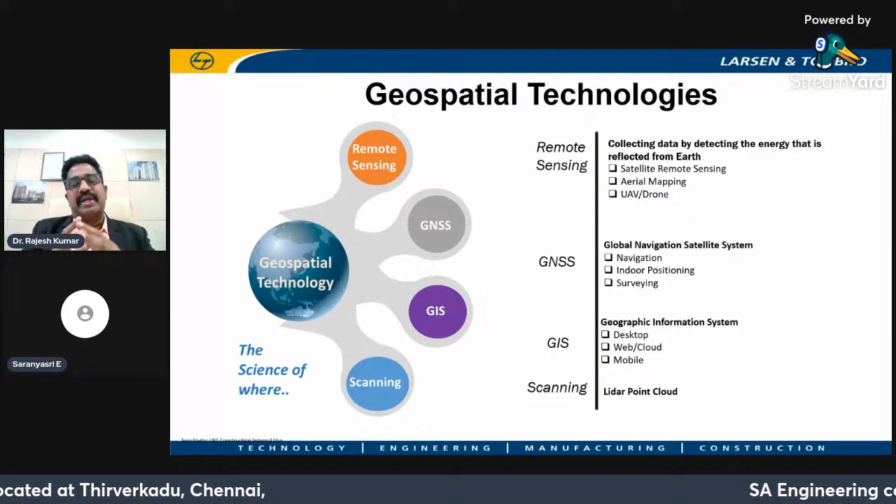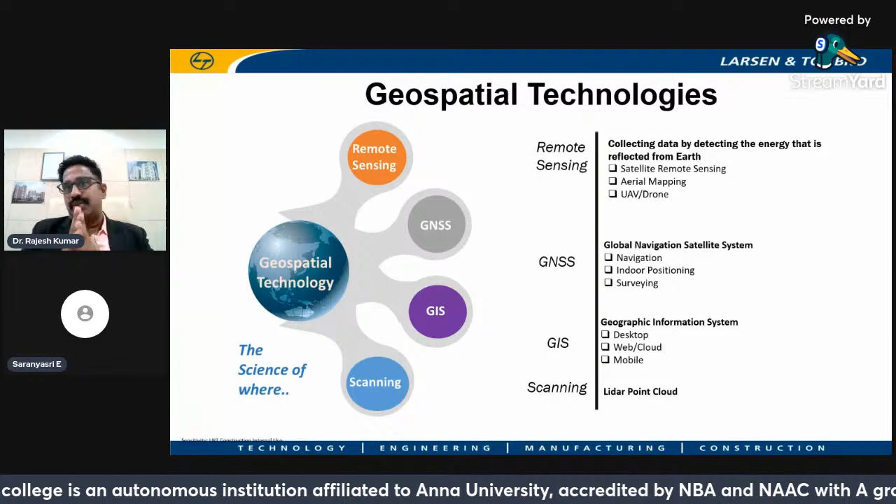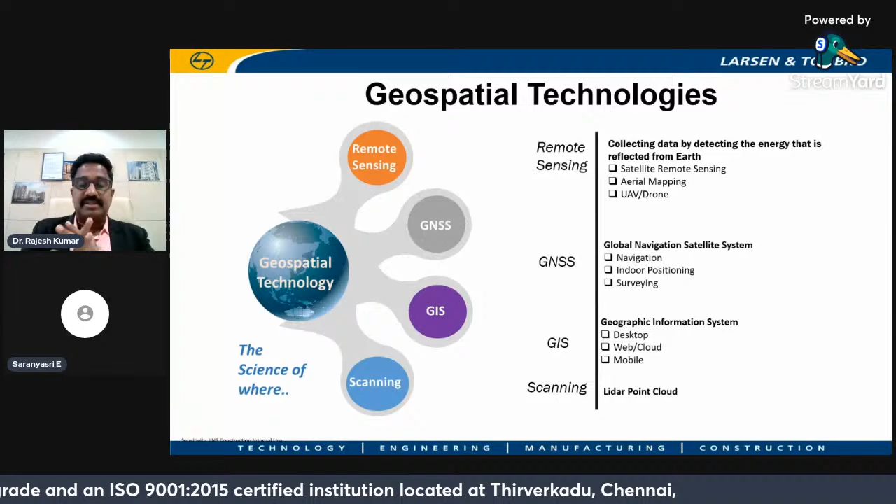Third one is GIS, Geographic Information System. It is a software. You may have knowledge of AutoCAD, where you'll be drawing and vectorizing lines, but you will not be showcasing the spatial data on it - latitude and longitude. You may be having coordinates, but not the latitude and longitude. That spatial data, the so-called spatial data, will be linked with the non-spatial data through GIS. GIS was earlier used just as an information system, but now it is not only for that - it is used for many things, which we'll see in subsequent slides.

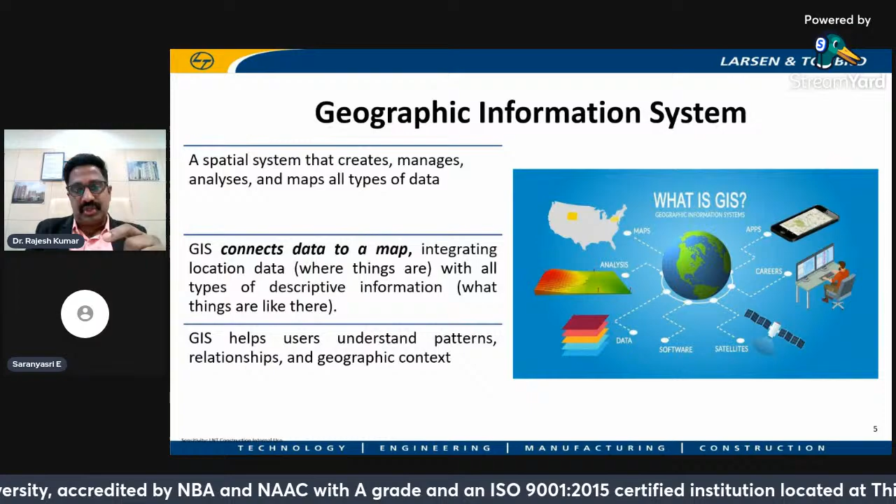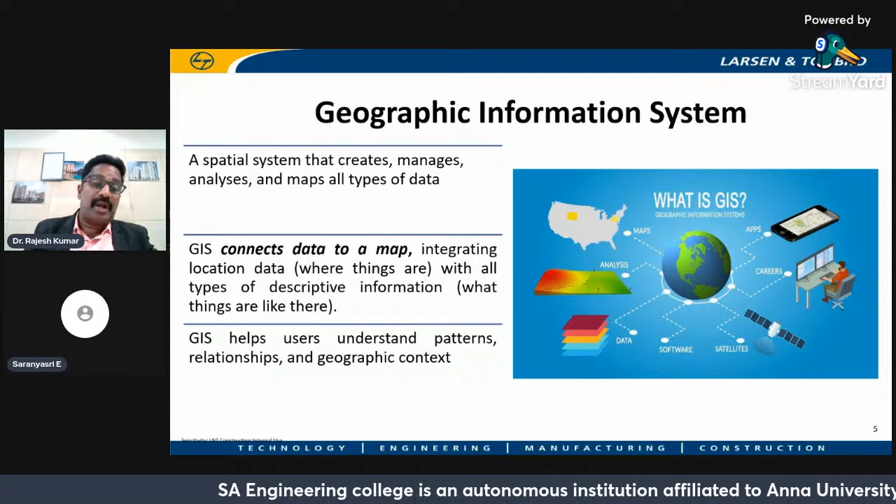As I told, this is just a view of remote sensing, where we'll be getting the energy source, and from the energy source it will reach the target, till it goes to the product applications - with no need of touching that particular area, and no need to know the complexity of remote sensing. Remote sensing is a simple process. GPS is a simple process where we'll be getting latitude and longitude. GIS is a software. All these three - remote sensing, GPS, and geographic information system - put together is called geospatial technologies, which we are using. We mostly go with GIS software, but the data needed is created, captured, or acquired using GPS or remote sensing techniques.

The most important thing I want to mention is lidar mapping. We started with chain surveying, then compass, plane table, then theodolites, and so on. Then leveling - the digital level was there, electronic total station was there. After that we went to GPS survey, and now we are in aerial lidar. The accuracy of aerial lidar is very high.

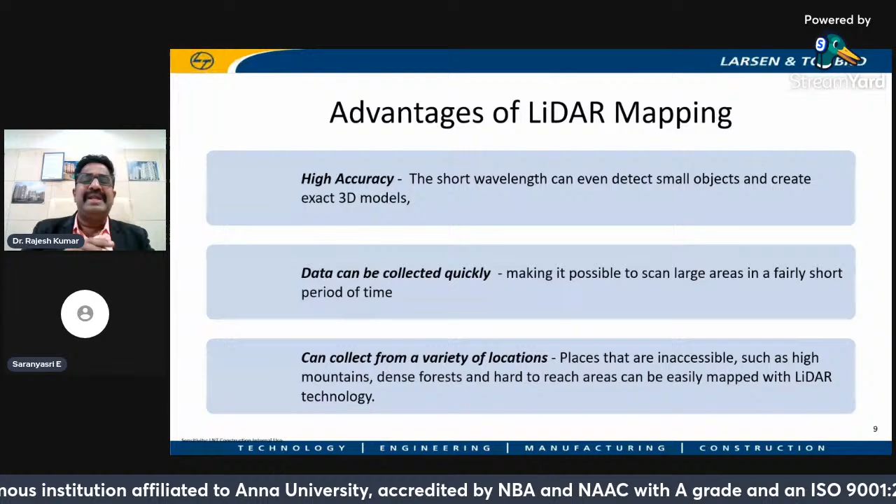Within 2 months, we can complete the total process of surveying if we are going for lidar mapping. The higher the possible area, we need to go for lidar mapping. The accuracy is in centimeters, so we easily get all the other derived details like contouring, DEM, or DTM, whatsoever it may be. Land use and land cover maps will also be derived from lidar. So anything is possible, and the accuracy leads to a lot of things in lidar. Nowadays, for any type of project, we are going for lidar. We are not just seeing the value of money, but the advantages and quality of the data we get using lidar.

These are some of the digital solutions which we have created in our team using geospatial technologies. The first one is called chak planning.

We divide the area into small parts when starting the irrigation system or any other bigger mega projects, where we are working with 1,000 or 2,000, even up to 5,000 crore projects. The area is very high, going up to lakh hectares, so the CCA will be more. When the CCA is more, it is not possible for us to go with AutoCAD, and the manpower we need will be more. We need 40 to 50 people in AutoCAD to do the chak planning, which is simply division of land into pieces of the required size, maybe a hectare, 0.5 hectare, 2 hectares, or 5 hectares, depending upon the client specifications.

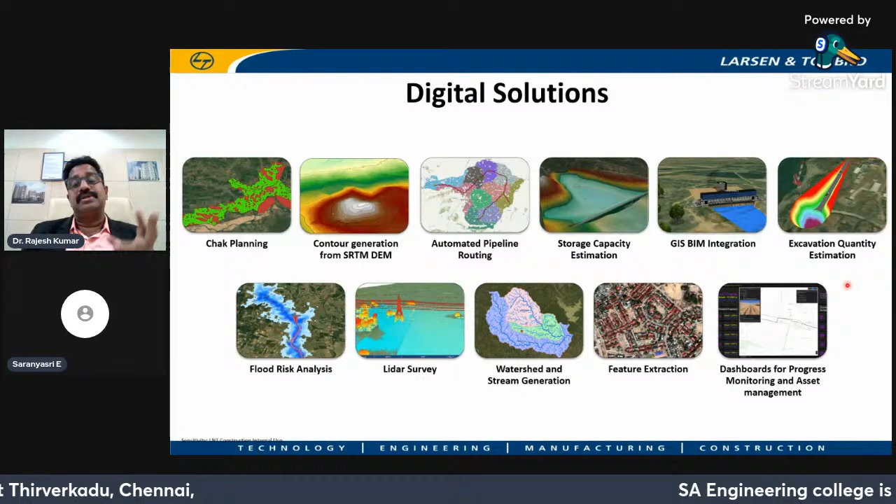Next is storage capacity estimation, which we have also done. Then GIS BIM integration, the details of which are in the forthcoming slides, which I'll showcase. And excavation quantity estimation, I don't know whether the slide is available or not, but I'll give a gist.

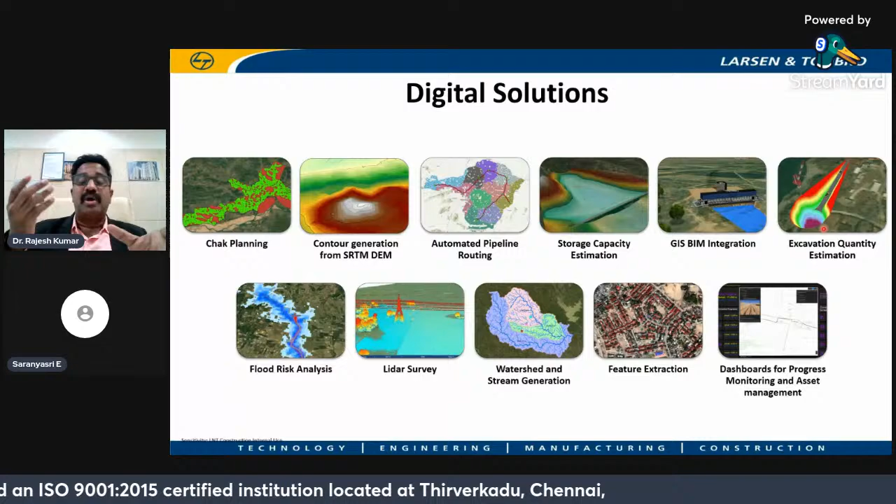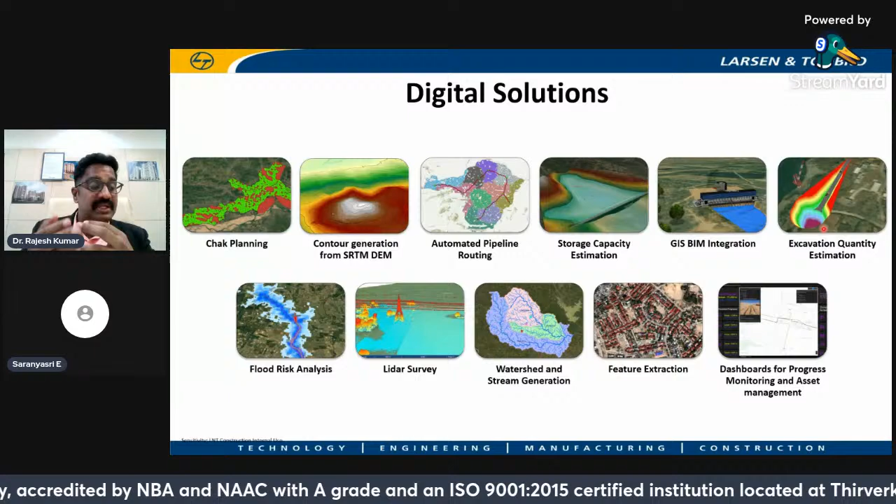After GIS-BIM integration, we had excavation quantity estimation. When using manual processes like the trapezoidal rule or Simpson's rule for excavation quantity estimation, the boundary will be intact with a defined shape. But in practical excavation quantity estimation, we will not have any intact boundary - instead it will be very irregular. So for that irregular boundary, we have used GIS processes to estimate the quantity.

Next, the most important thing we are doing is flood risk analysis. A lot of the areas where we do projects are prone to flash floods, so anytime it may come. We are doing flood risk analysis using GIS and HEC-RAS.

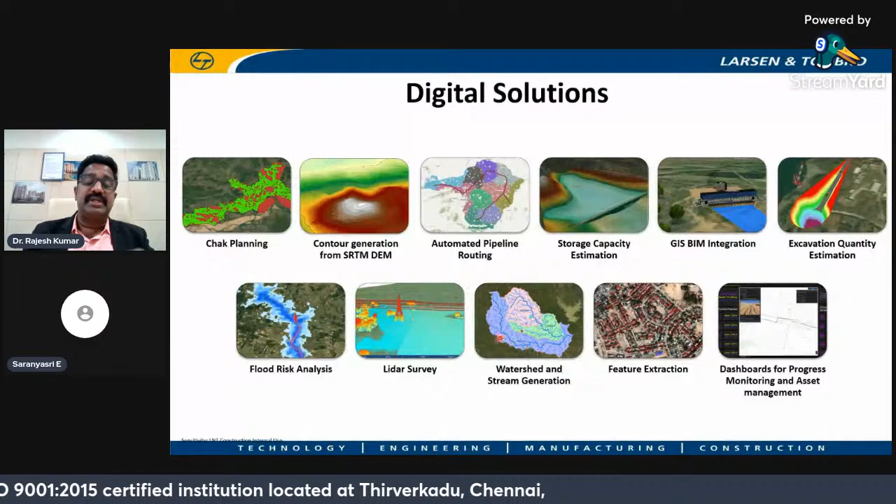Then lidar survey, as I already told. Then watershed and stream generation - the shape of the watershed and the streams flowing inside it. All of this we have done digitally.

The most important thing is feature extraction. Earlier we would go for visual interpretation of satellite imagery, but now we do it automatically. The feature classes will be extracted automatically - we train the system with training sets, and then we get the results.

Then the most important thing we have started here is progress monitoring. When we wanted to showcase our digital solution, the first application we showcased was progress monitoring. After designing, the project goes to the execution stage, and when it goes there, we need to know whether execution is happening or not.

Just like in a college, there will be top management down to lower management. Likewise here, we have the CEO, then directors, then VPs, then GMs, then other project managers. So if project managers want to showcase anything to the CEO or higher management, they would normally need to go to the particular place to see the progress.

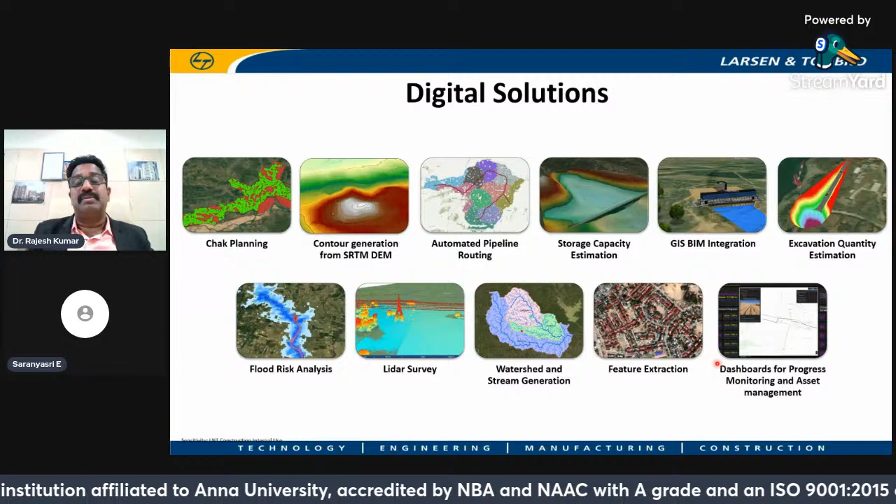Instead, what we have done is put everything into a GIS environment, so from their own place, they can see the progress. At the end of every day, they can see the progress. So at the site, there will be updates on how many kilometers have been completed, and we can immediately see it here itself. We have created dashboards which have had a great impact in our industry.

This is a process of lift irrigation, where I am working. We do a lot of irrigation projects where we have an intake from a river or any source of water. From there, the water is taken and eventually distributed to the farmer's land.

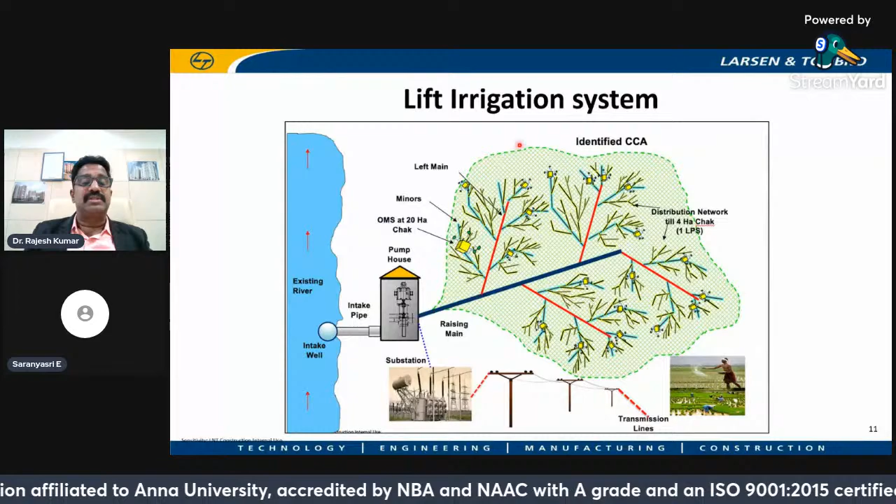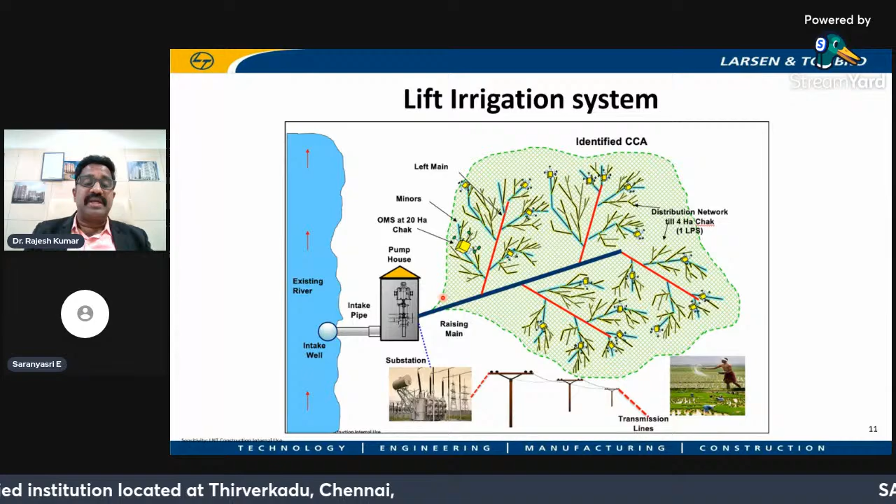So this is the main pipeline, and these are the distribution pipelines - all of these are distribution pipelines, and they are designed accordingly. Pump houses are designed by the civil team, and the pipeline design is done by the mechanical team. This pipeline design and mechanical design work, we have now automated using geospatial technologies.

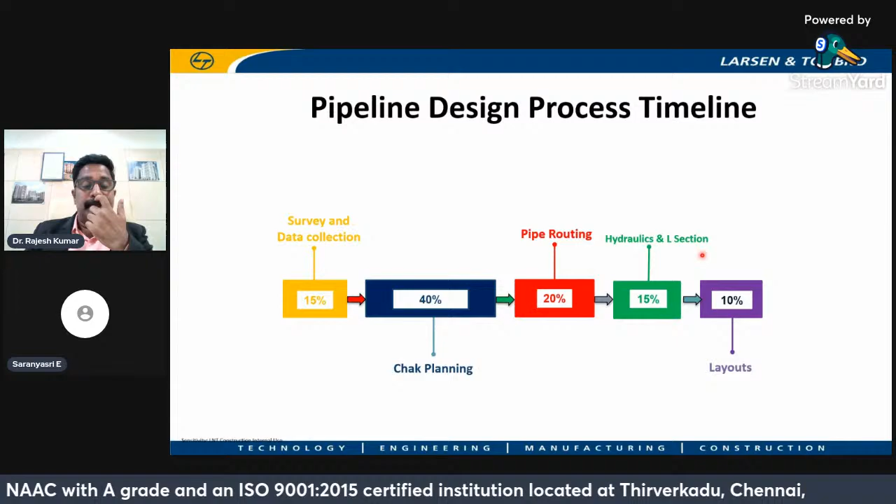This is the pipeline design process. It starts with survey and data collection, then we have the chak planning process, then pipeline routing, then hydraulics and L-section, and finally we prepare layouts which are submitted to the client.

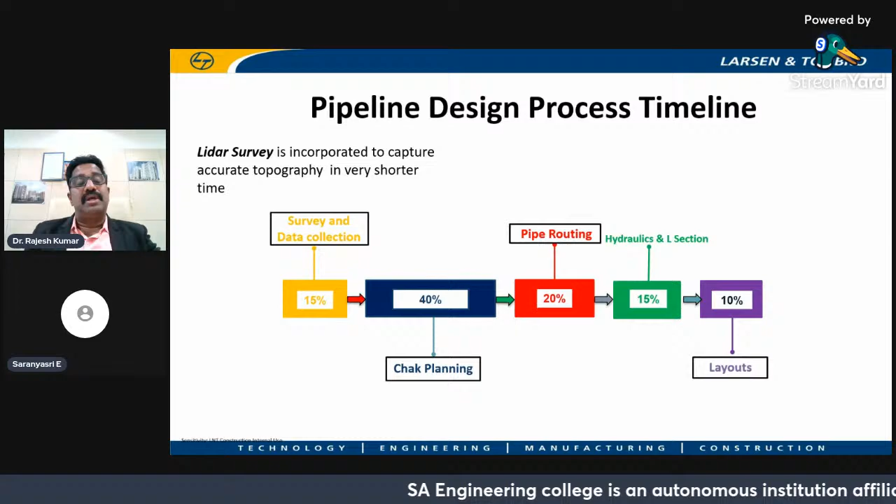That is the conventional way. What we have done instead of a normal total station survey is go for LiDAR survey, since we can capture a larger area in much shorter time, and more accurately too.

For planning and chak planning, we are using a GIS-based tool, which reduces more than 60% of the man hours and time. Next, automated pipeline routing has reduced nearly 90% of the man hours using geospatial technologies. Then for the layout, we have reduced almost 90 to 95% of the drafting time.

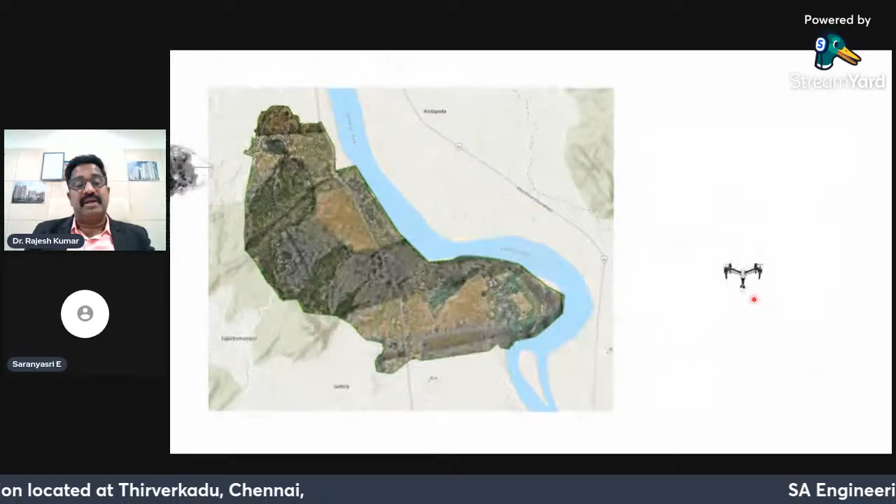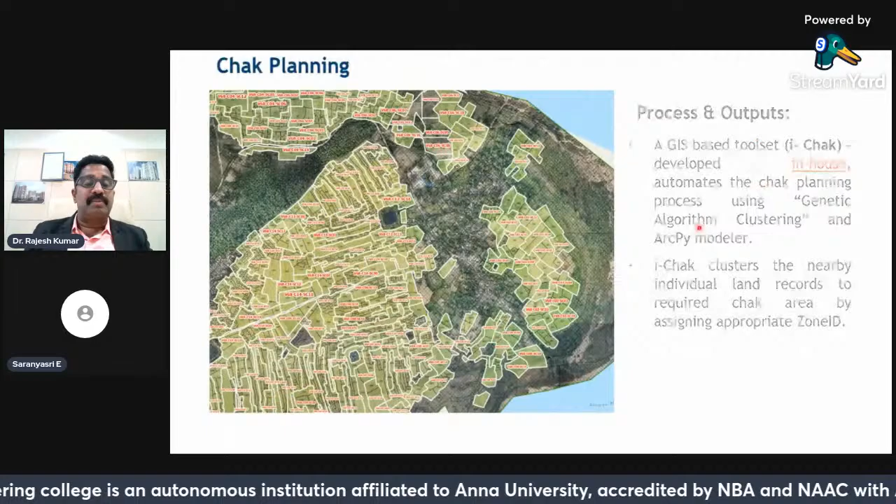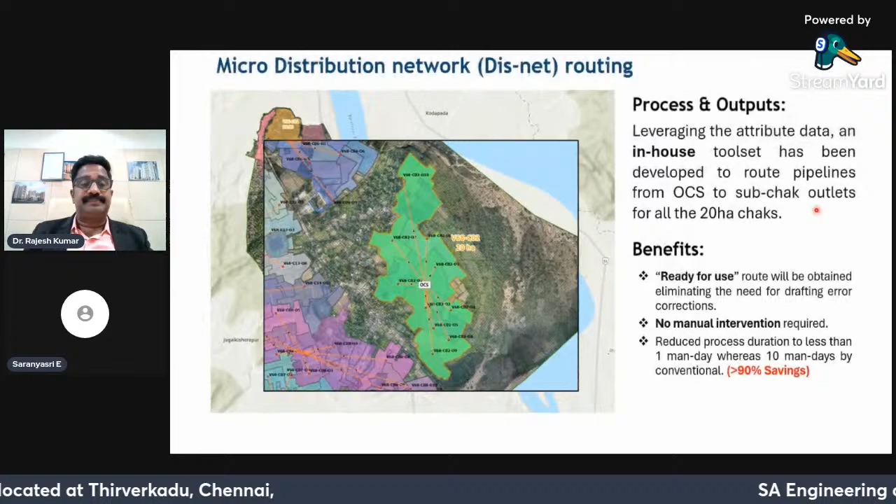And this is micro distribution network routing. These are all routing; we have used the least cost path method for the main pipelines. What we have done is take these main pipelines into the WaterGEMS software. These are the visually appealing outputs. As per the client requirement, we'll be making the outputs and submitting it.

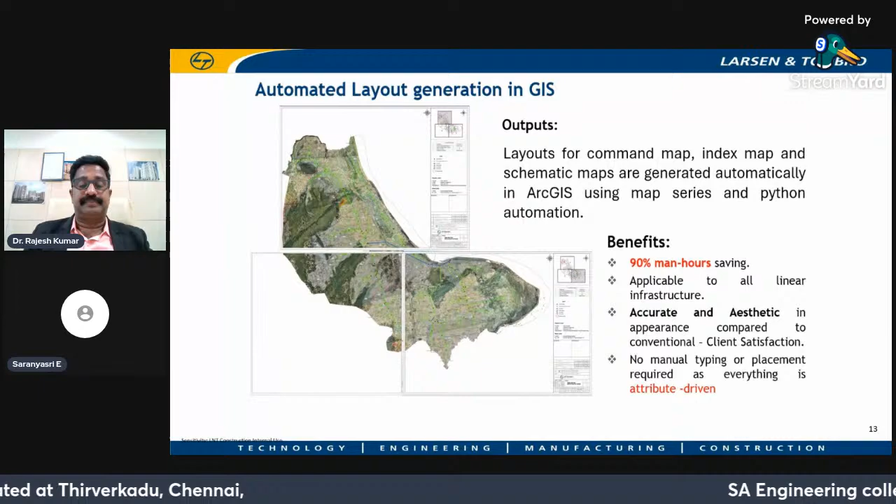Next comes GIS BIM integration. You may already know about BIM technology, building information modeling. It produces a three-dimensional model, and each and every model created with BIM is very heavy.

So what we'll be doing is bringing that BIM model into GIS. Maybe some 100 or 150 models will be there for each project, and all those 3D models will be brought into GIS, so we can see them very easily. Not only the models, but three-dimensional pipelines also will be brought here.

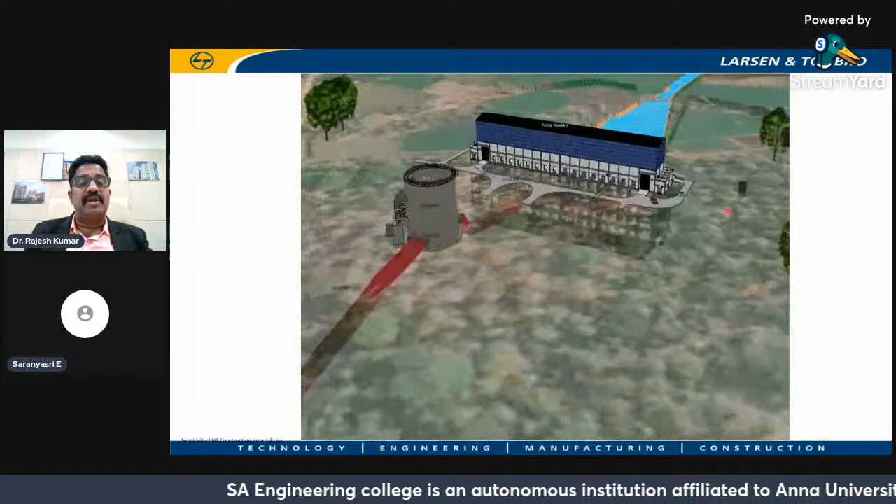You can see a video here. This is a pump house model that has been brought into the GIS environment. This is the booster pumping station, and these are the three-dimensional length pipes with chainages also. You may be aware of chainage - each and every chainage will be there, and you can see the land use. There is satellite imagery beneath this.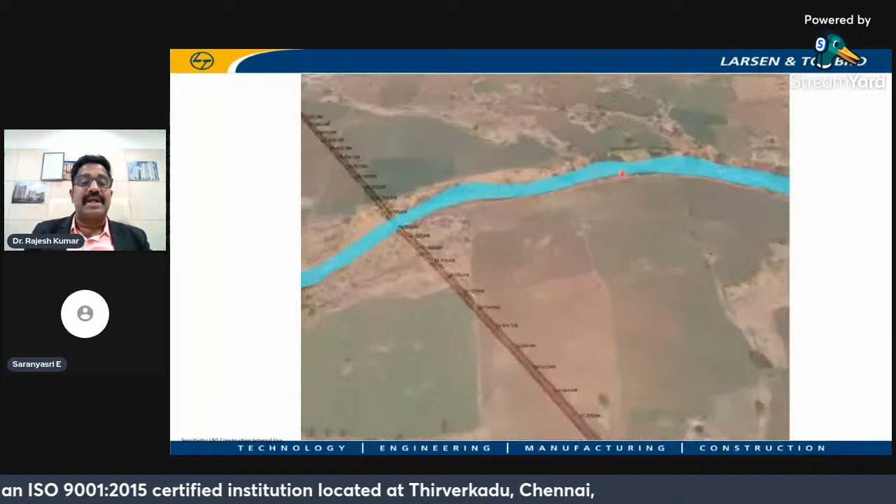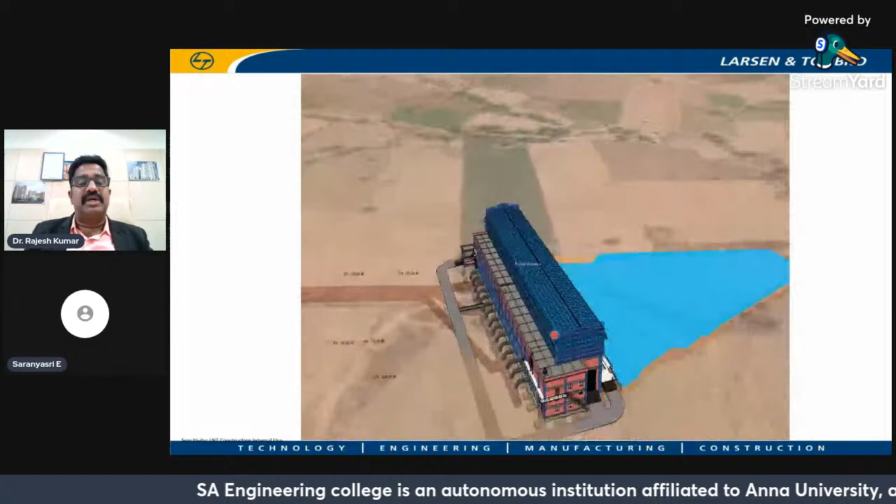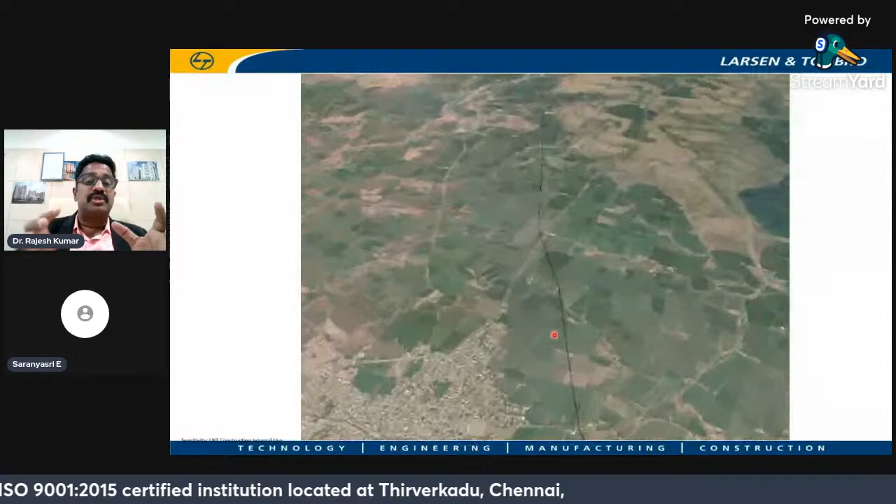It will be taken till the end. It is another pump house, and these are the chainages. The advantage of this is once we have done the design data, we bring everything into the GIS environment. When it is brought to the GIS environment, it will be shown to the client before starting the execution itself. It will be shown to the client, to the higher authorities, so they may decide not to place something here - it should have been placed there because of some encroachments.

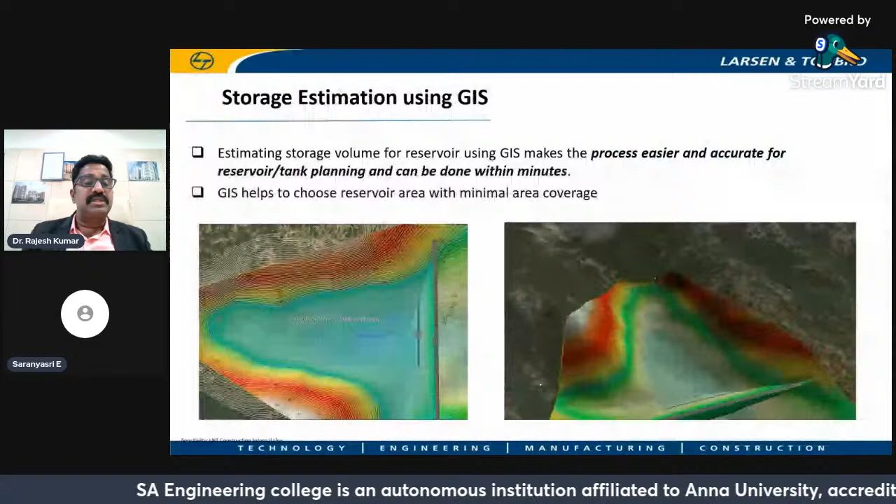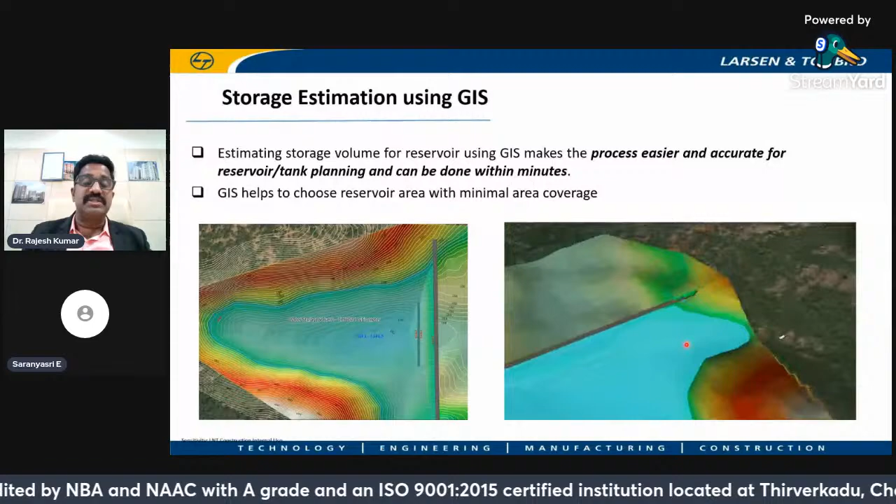This is storage estimation using GIS, where we calculate the storage volume, and the visualization we can showcase using geospatial technologies, which will be easy for the engineers, execution engineers, to decide how they need to go on.

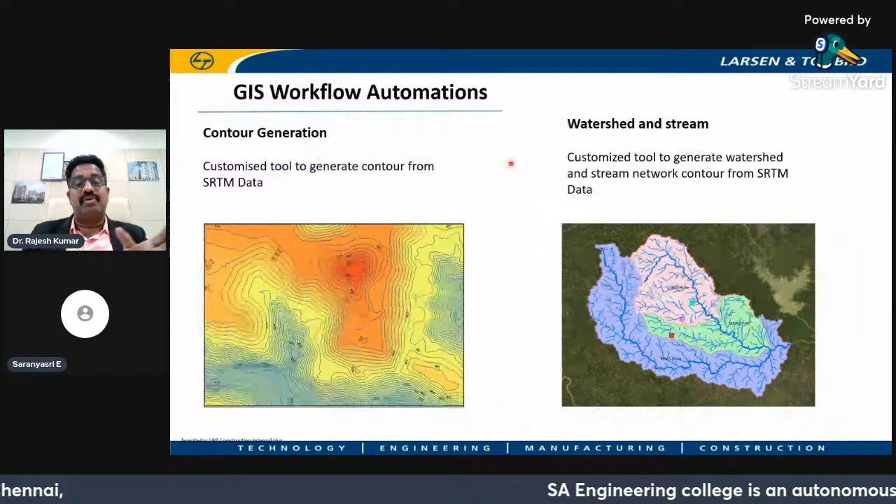These are some other GIS workflow automations. What I told there, one is contour generation, another is watershed and stream generation, and the next thing is flood risk analysis.

In flood risk analysis, what happens is we'll be using HEC-RAS or HEC-HMS software to find out the finished ground level, so the water may not go up. Likewise, we need to go for the finished ground level, and for finding that finished ground level, we need to do all this process.

You can see the IDF curve - intensity, duration, frequency curve. In case rainfall value data is not available, we'll be creating these IDF curves. In some abroad projects, they'll already have these IDF values and curves with them, but in India, we don't have IDF curves for all parts of the country. So if rainfall data is not available, we ourselves will create these IDF curves.

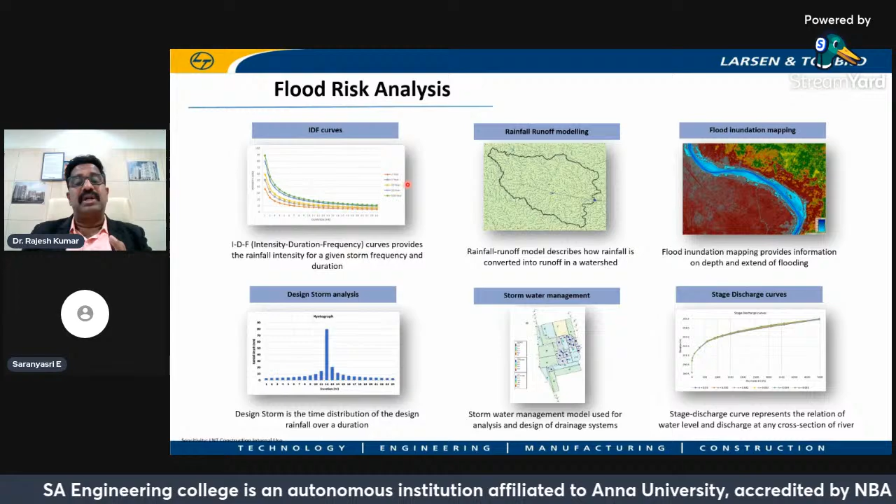Then we'll go for the runoff model, flood inundation mapping, storm analysis, stormwater management, and stage discharge curves, which will also be developed and submitted to the civil team so they can proceed with the design.

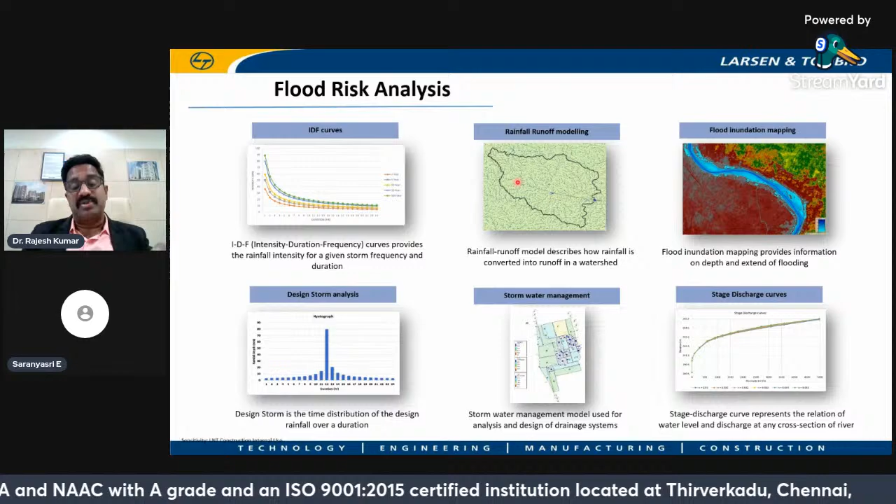And the next one is excavation estimation. I mentioned we'll be using formulas like the excavation formula - we would have Simpson's or end area process. Likewise, we'll go for many formulas, but those formulas won't give the accurate value. Instead, we'll be creating the excavation profile in GIS with each and every contour we got from LiDAR data, so the accuracy of this will be more.

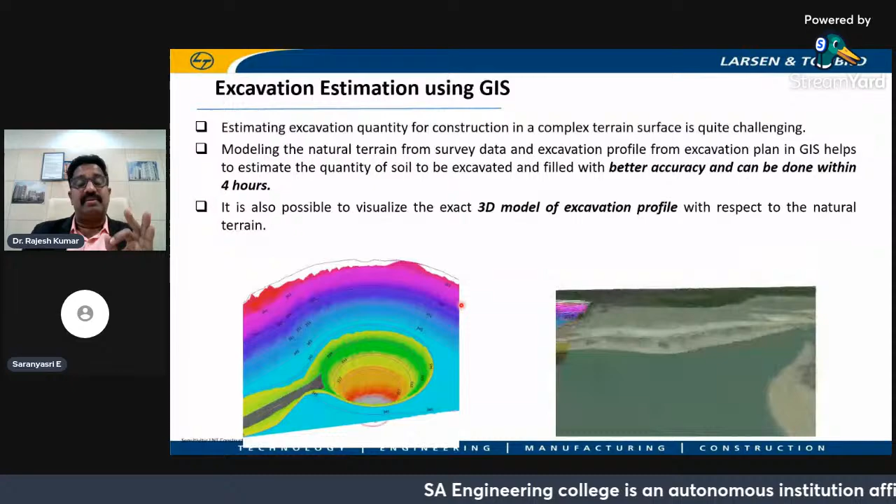Excavation values what we have got from GIS we are using to give to the vendor for billing purposes.

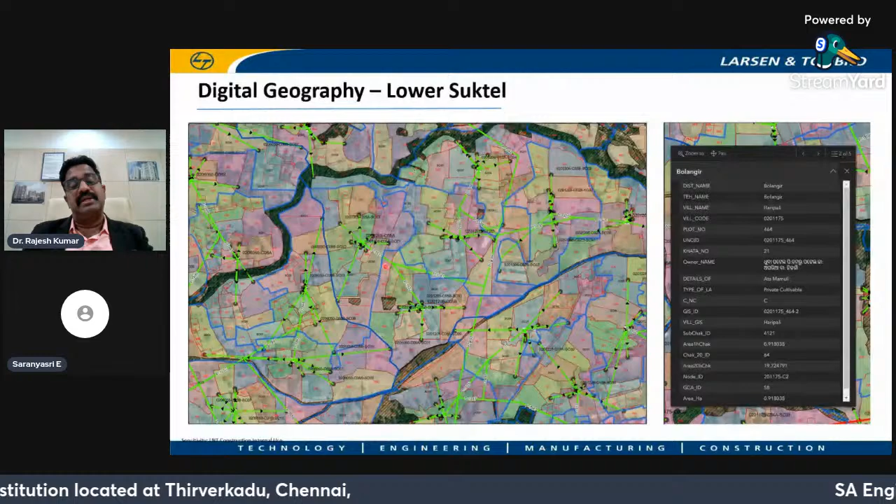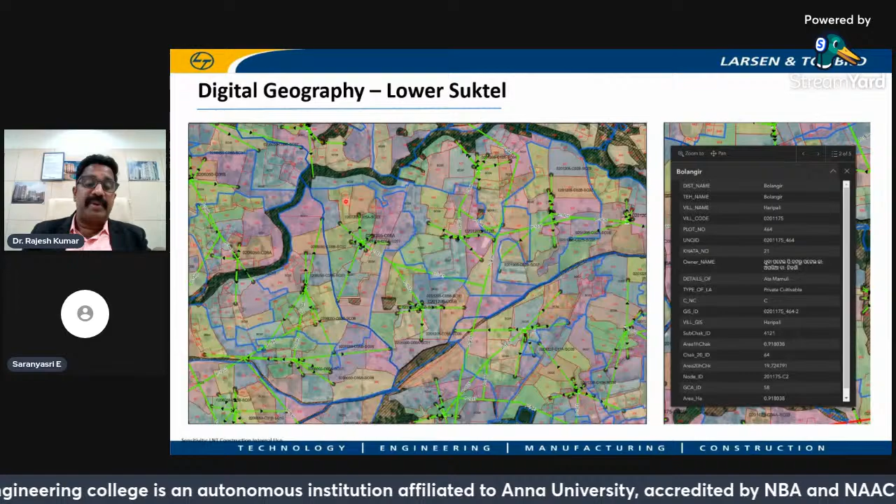The most important thing we are doing is digital geography. This is for a project, Lower Suktel. We have done it. So what we'll be doing is keeping all the layers one above the other, so when it is given to the execution engineer, he will see all the layers - maybe pipeline routing, main pipelines, distribution pipelines, land uses, chak planning. All these will be available in a single map, and they will be using it for execution.

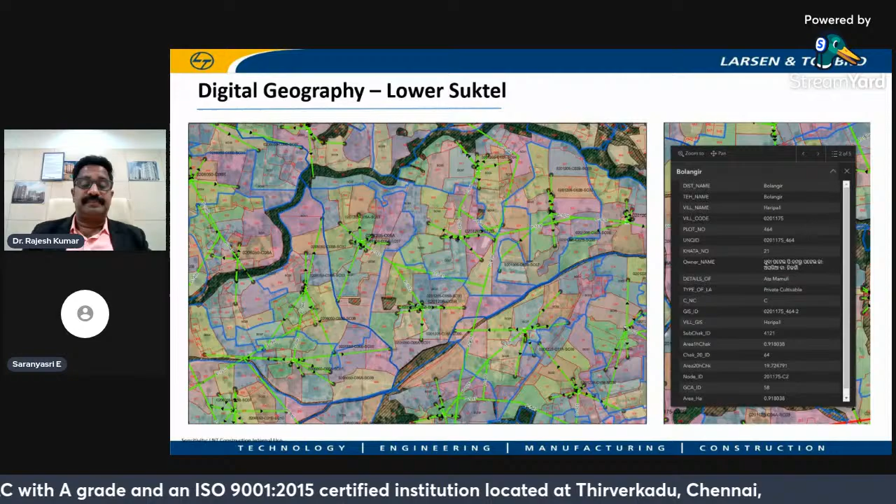This is progress monitoring. When it comes to pipeline progress monitoring, we have four processes. The first process is called excavation. Second process is laying the pipeline. Third process is filling, and the fourth process is hydro testing. All these four processes will be done for the whole design data that is being executed at the site.

So what we'll be doing is we have created a GIS environment for a dashboard, which is for progress monitoring. This will be given to the site engineer who is involved in execution. Once a process like excavation is completed for a length, he'll say that excavation has been completed and fill it in the table attached with this. When he has filled it, we can see all these things.

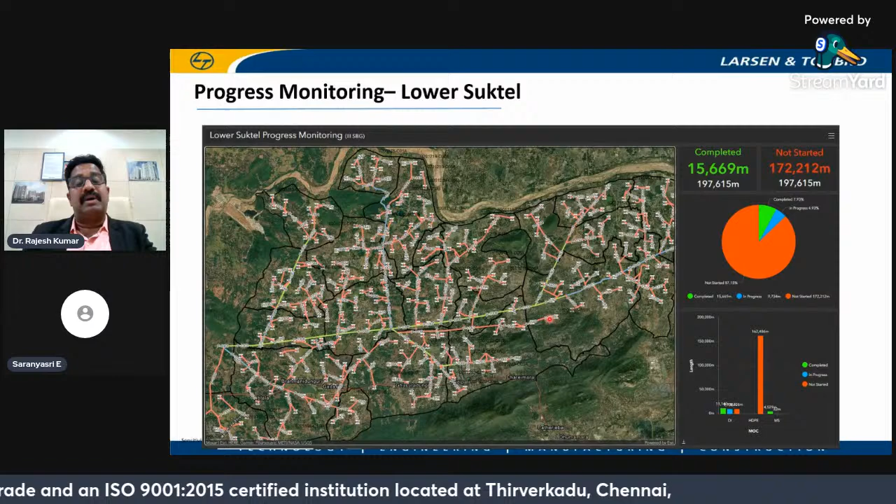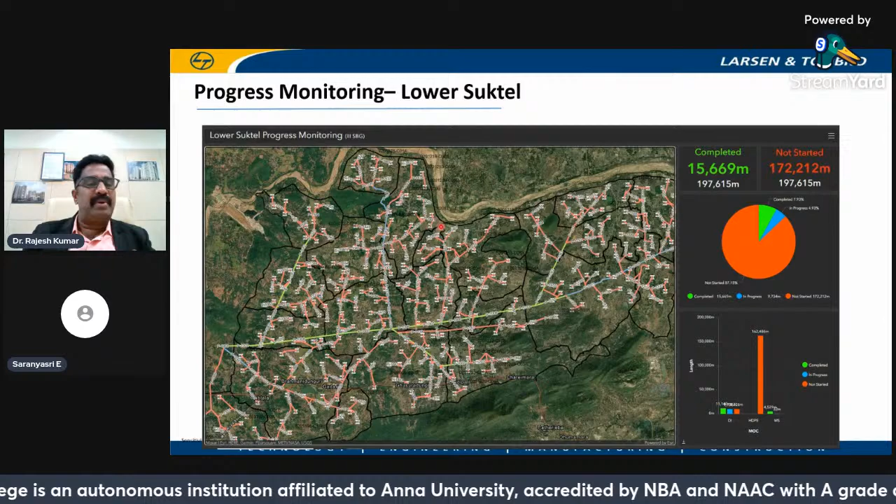This completed, not started - all the details will be seen. There's no need for any of us to go to the field to check whether these happenings are true or not, because our site engineer is doing it. He will be updating our environment so we can see it immediately, take stock of it, and any problem that happens will be immediately solved by the management team. This is one of the very important things we have done here.

At the end of the day, we can see how much length has been excavated, how much has been filled or laid or hydro tested. All these will be taken using this mobile application itself.

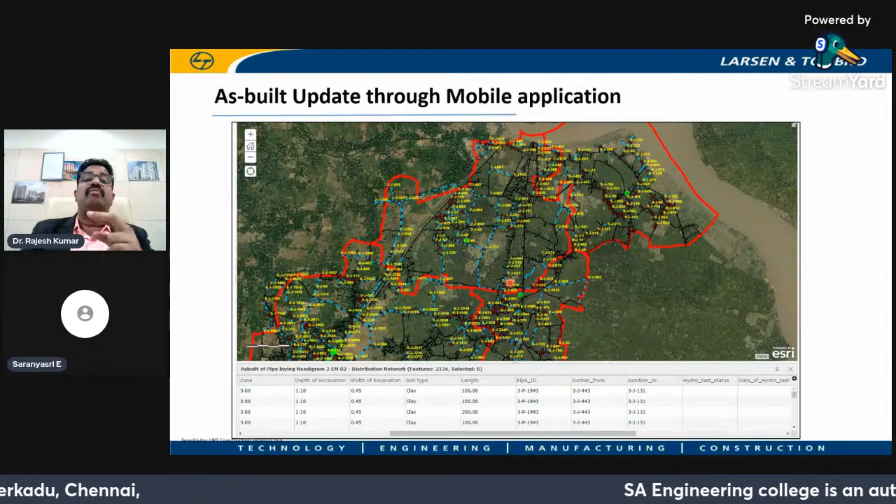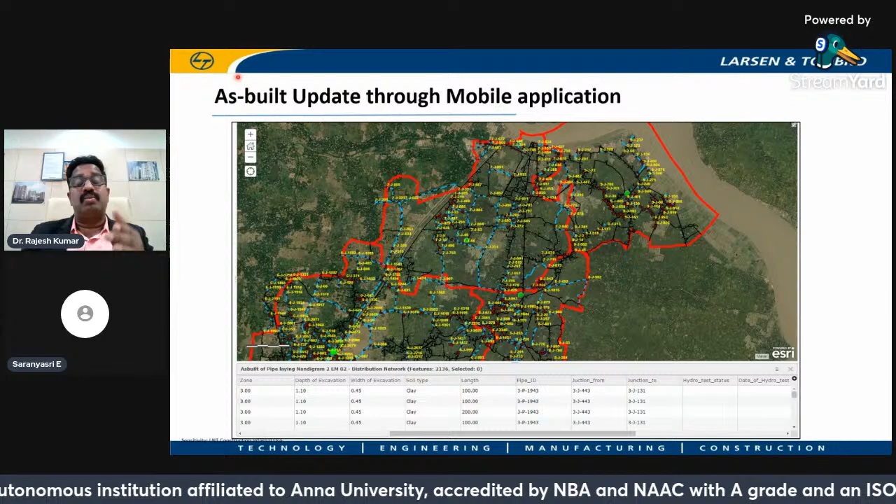Then we are trying as-built updates through the mobile application. When we do design and give it to the execution side, execution will not happen exactly for the design data as given. Due to encroachment problems, people may not give their land, or some villages will not want the pipeline to pass through. Lots of such problems come up, and by the time we execute, the site engineer himself may decide a new path. So when designing like that, we'll update this as-built, so whatsoever is actually executed will be available in the application.

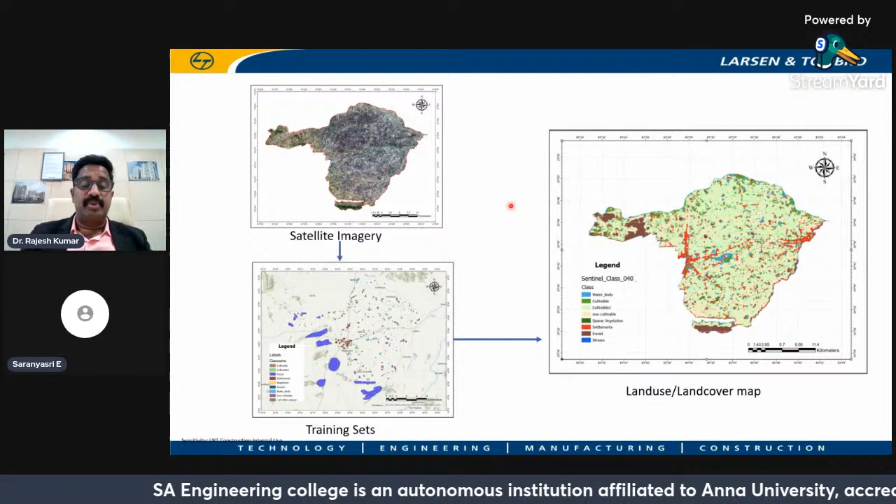Building footprints and image segmentation processes also we are doing. From the satellite imagery, we'll give training sets, and based on these training sets, we'll get outputs like land cover, land use map, or whatsoever it may be.

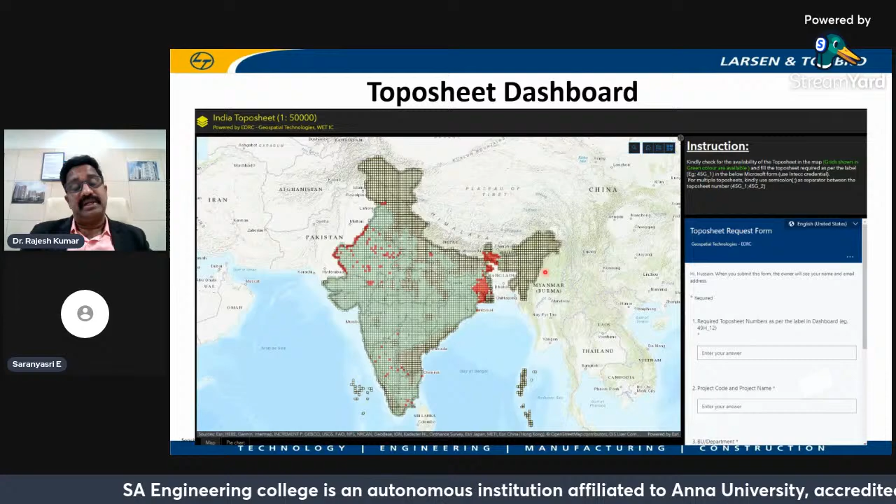One of the most important things we have developed is the topo sheet dashboard. This will consist of topo sheets of India. In some cases where it should not be produced, it will not be available, but all other areas it will be available. We have collected Survey of India topo sheets and created this topo sheet dashboard, but this will work only inside our campus, for our mail IDs only. So if any topo sheet is needed for any work, they can download it very easily. This is done using the GIS environment only again.

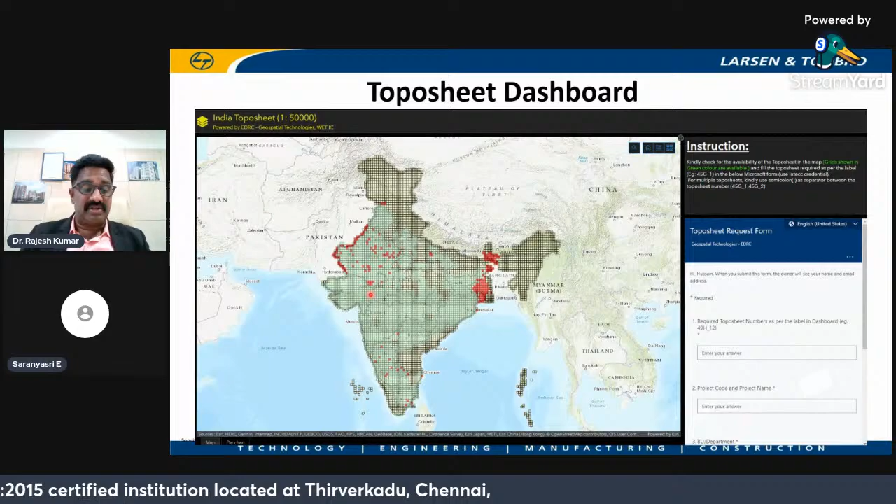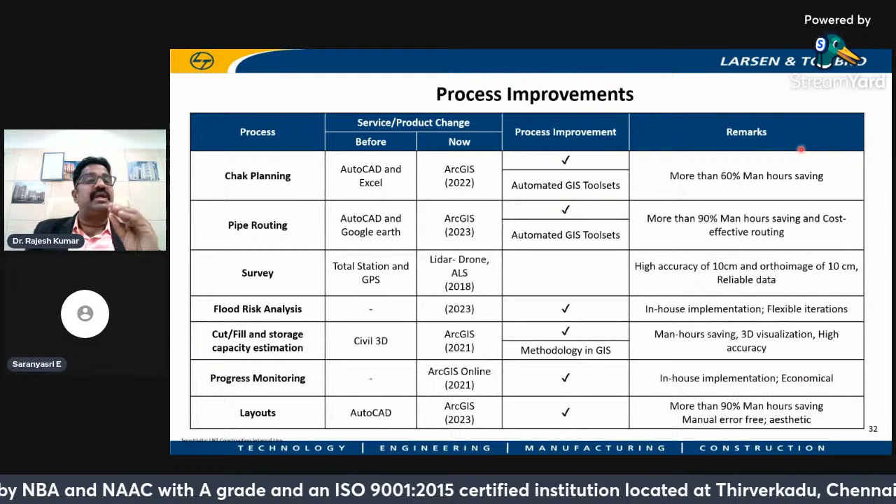Pipeline routing, again they used AutoCAD and Google Earth, but now directly we have given automated GIS tools from 2023, where there is more than 90% man-hour saving.

Similarly, for survey, we used total station and GPS earlier, but now it is with LiDAR and drone only. Accuracy is more, and it can cover larger area in much smaller time.

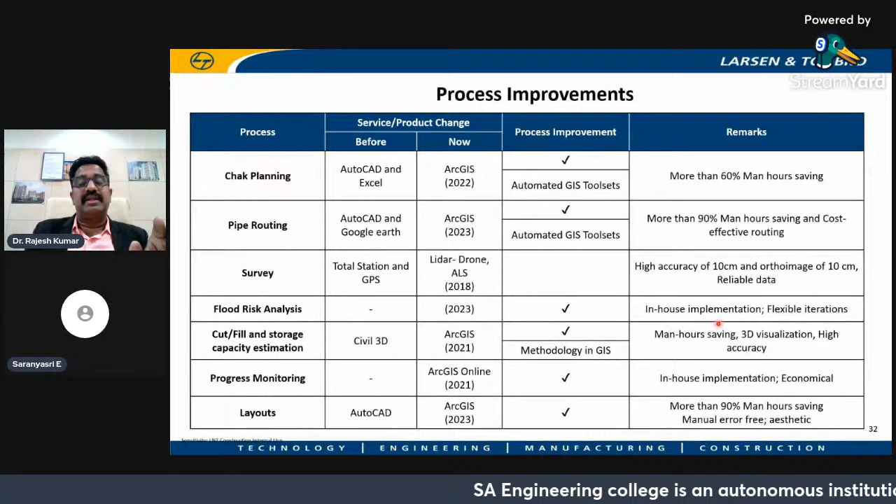And flood risk analysis, we have not done it before, but now our team is doing this. It is in-house implementation, and we'll do it for a lot of iterations.

And storage estimation or cut fill, everything they used Civil 3D earlier, now we have gone with ArcGIS. Similarly, for progress monitoring, it was not done before, but we now use ArcGIS Online or ArcGIS software for doing it, as it is very much economical also.

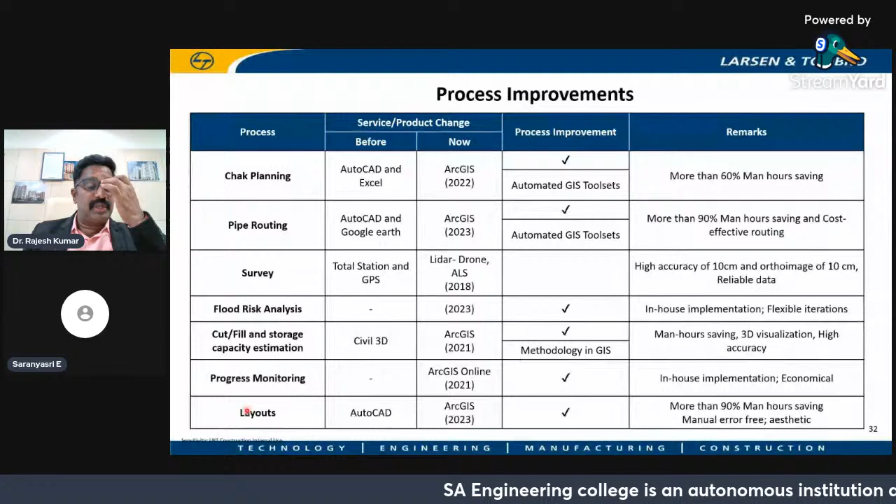When it comes to layouts, we did using AutoCAD earlier, so 4 to 5 months, 5 to 6 engineers and draftsmen would be sitting and doing all this. But now we are using ArcGIS to do it, and the results are also very much appealing.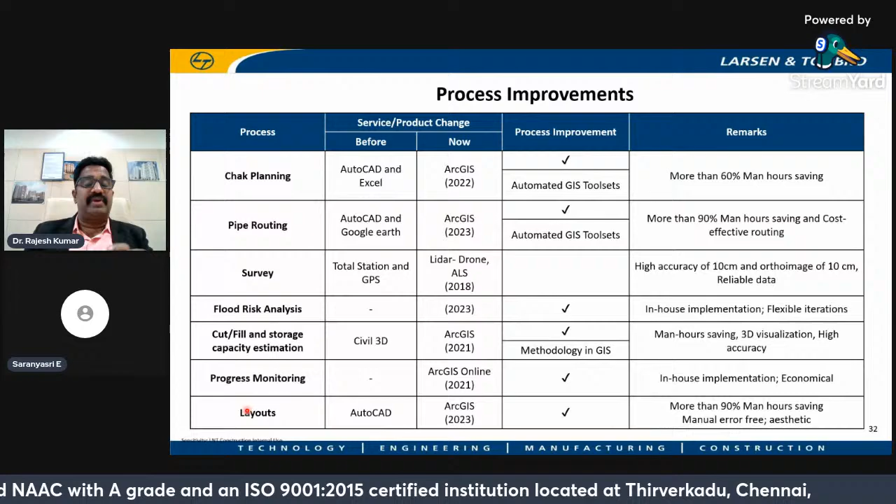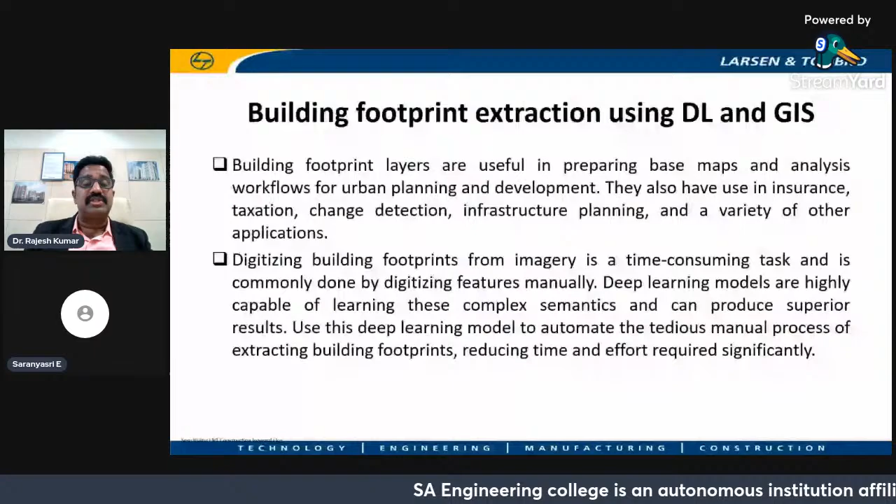I may be concluding now, but before that I'll mention three things. What are the achievements that we have made? The first thing is this mechanical design workflow which we have made using GIS.

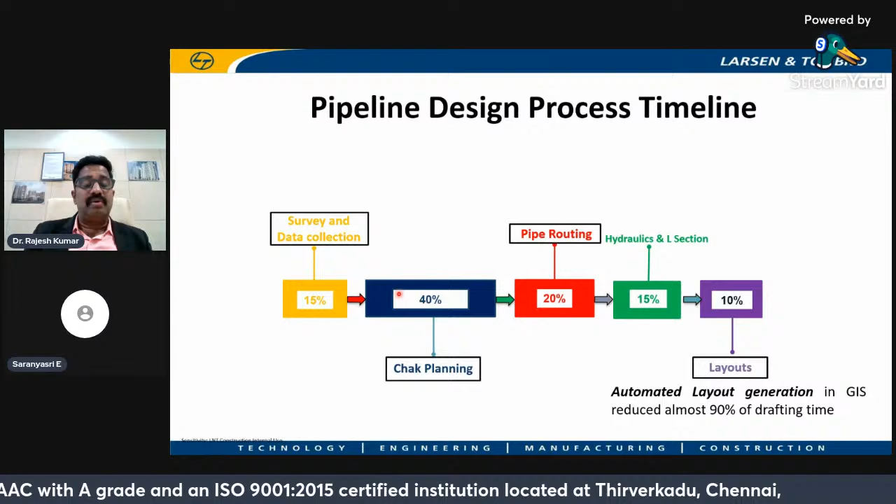This is a conventional workflow which we automated, everything using GIS. This is one of our greatest achievements.

We are trying for a patent also for this. If not a patent, we'll go for copyrights. We are trying for it. Most probably within this year—well, 2024 is going to be over, so maybe within 2025 we'll be getting a patent for this. This is the best achievement.

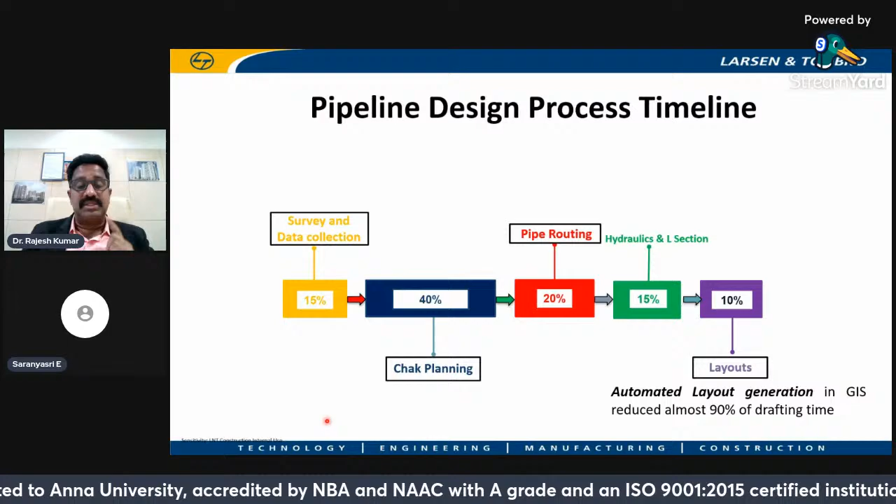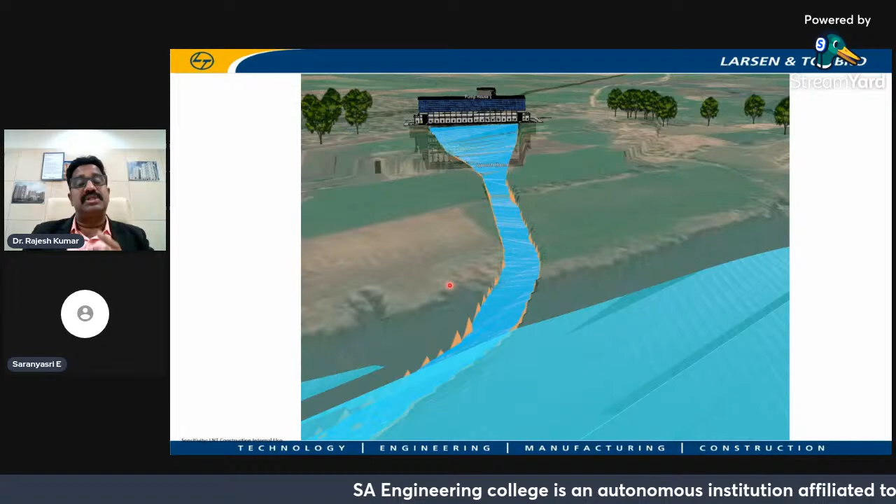And the second one is this GIS-BIM integration. This is one of the excellent achievements, used for full decision making. Whereas we can't bring all the models into a BIM environment, we can bring all the models into a GIS environment. That is what we made possible.

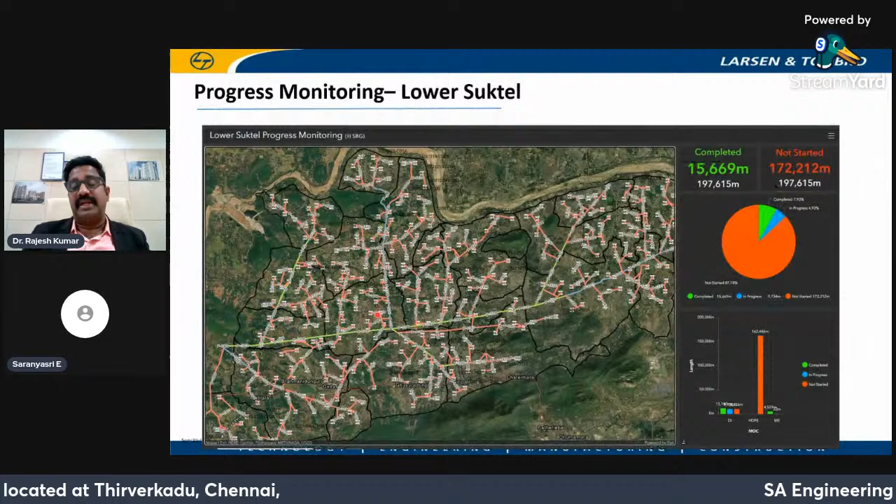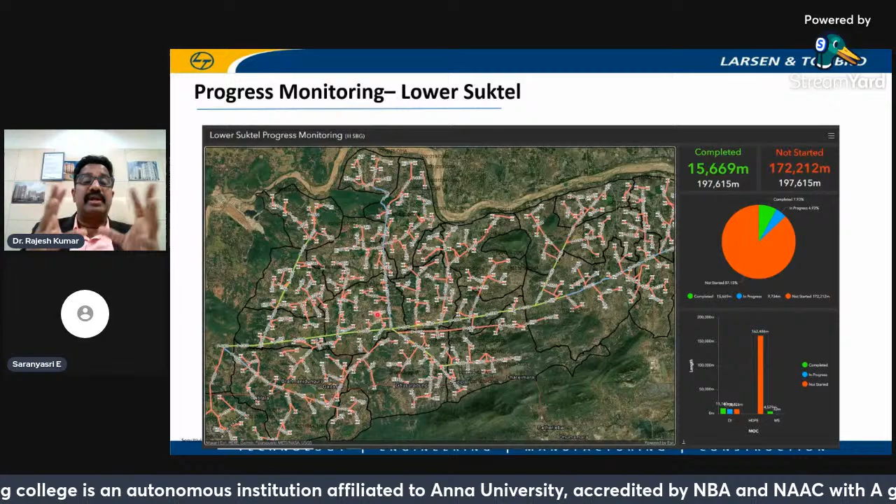And this, anybody can do. Progress monitoring again—I think nobody has done it, but we are pioneers. We at L&T are the pioneers of progress monitoring, and WET IC is the pioneer for the mechanical design flow process, and WET IC is pioneer again for GIS-BIM integration. So all these are like one more feather on our head.

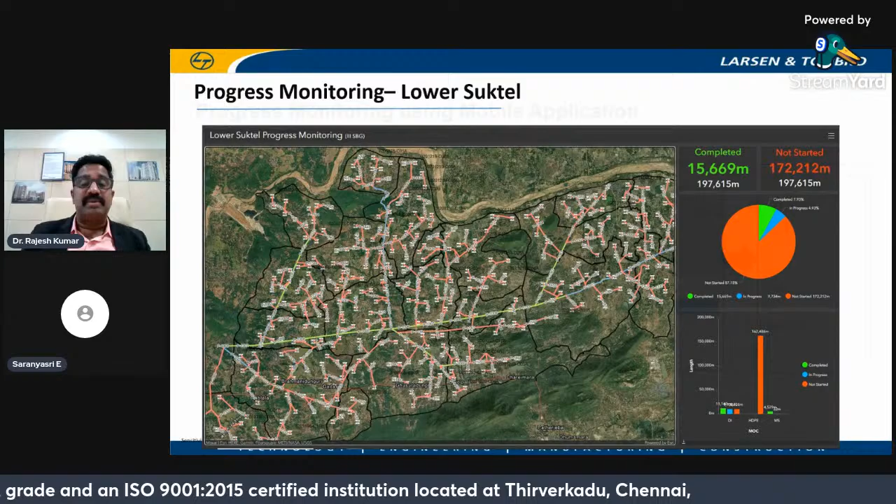I think I can complete this already, it is more than 30 minutes. And we are here now with these process improvements.

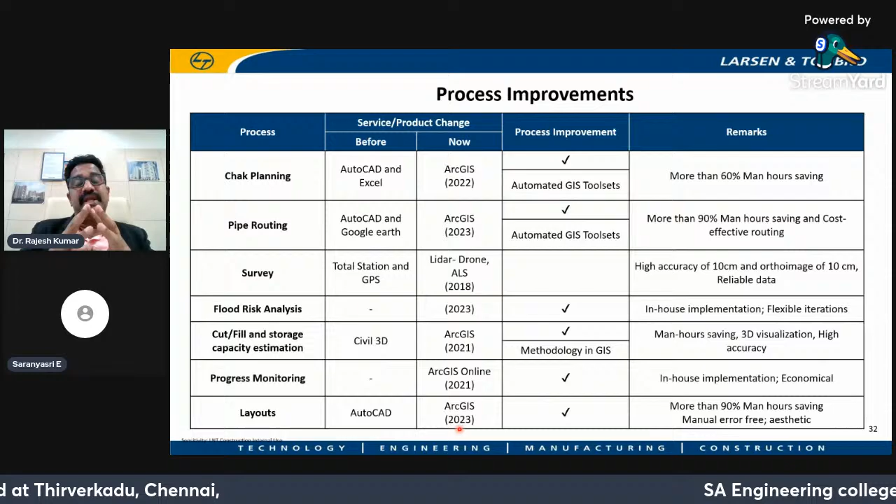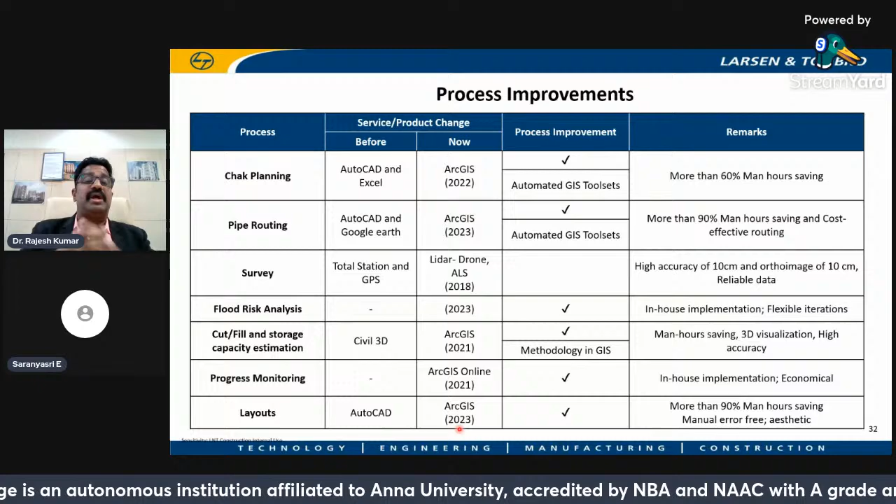So any engineer, practicing engineer, or those working in a company can go for this GIS environment, which is very much beneficial for man-hour saving, getting efficient results, and getting error-free results also. You can work with any larger area, and any number of data can be saved, merged, and displayed in this. Any number of maps can be added, or you can do anything like Venn diagrams—A intersection B or A union B—whatsoever it may be, you can do with this GIS.